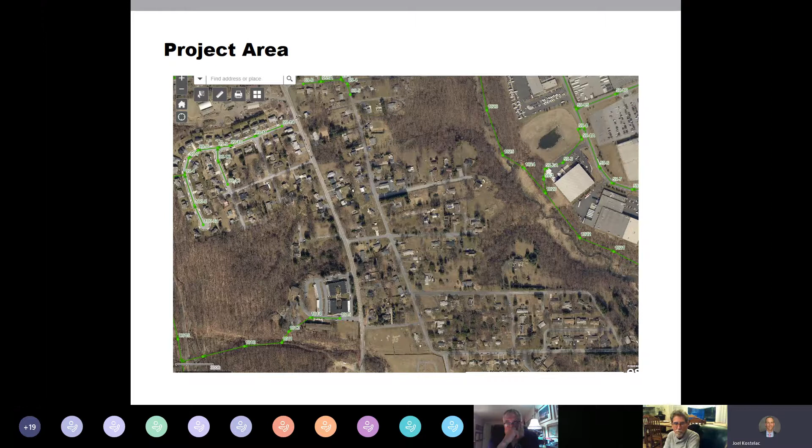So the project area encompasses the final portion of the township that has any density associated with it that is not served by sanitary sewer. It includes areas both east and west of Progress Avenue, from about Park and Wilhelm south to the cemetery, essentially where the borough or township line is, covering that whole area. This picks up some properties on the west of Progress Avenue that were not served when the northern portion of that development was constructed, and then areas associated with Wilhelm, Beaucrest, and Beaufort on the east side of Progress Avenue.

Some of you know this, but the reason this project is being required has to do with something called an Act 537 Sewage Facilities Plan, which was completed by the township and approved by DEP in 2013. This regulatory act requires municipalities to do comprehensive planning of their wastewater facilities on a regular occurrence. As part of that, some of you have been in the neighborhood for quite some time - there was water sampling and general survey work accomplished by both us on behalf of the authority and the township's engineer at the time. Through that analysis, the DEP is requiring the township complete this project, and the township, through the authority, is ultimately the vehicle for implementation.

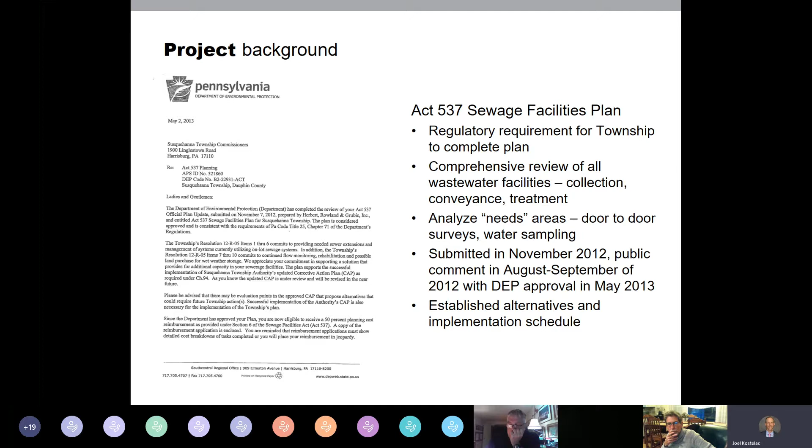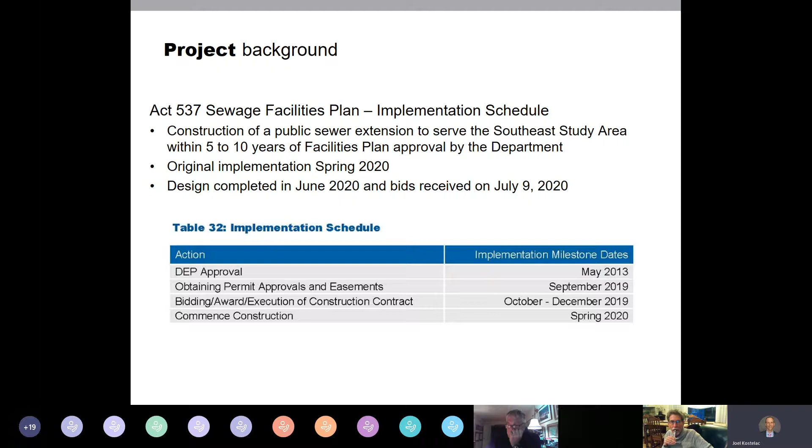The original schedule called for implementation of the contract commencing construction in spring of 2020. Obviously, due to a lot of other circumstances, that's delayed a little bit. We did complete the design in June and put the project out for competitive bids, as required by the public bidding law, and received those bids on July 9th. Since then, we've been working with the contractor to get into a position where the authority was ready to award the contract and proceed with construction.

Just some facts about the project - it is not an insignificant project whatsoever. It is quite extensive and expensive. We have about 17,000 lineal feet of gravity sewer mains and laterals. That's the piping in the street as well as the lateral piping that goes to your property line.

We have 92 manholes, 2 grinder pump stations, and associated with those grinder pump stations, about 600 feet of small diameter force main, 1.5 and 2-inch force main. And then, of course, with all of that comes putting your neighborhood back together - streets, yards, right-of-ways, stream crossings, etc.

As many of you probably know, the existing sanitary sewer facilities are on the other side of the creek, east of the creek on the east side of Progress Avenue, and then on the west side of Progress Avenue, there in Park Road, which was previously constructed by McNaughton. So many of you will flow to one of 4 connections across the creek, and others will go north towards Park.

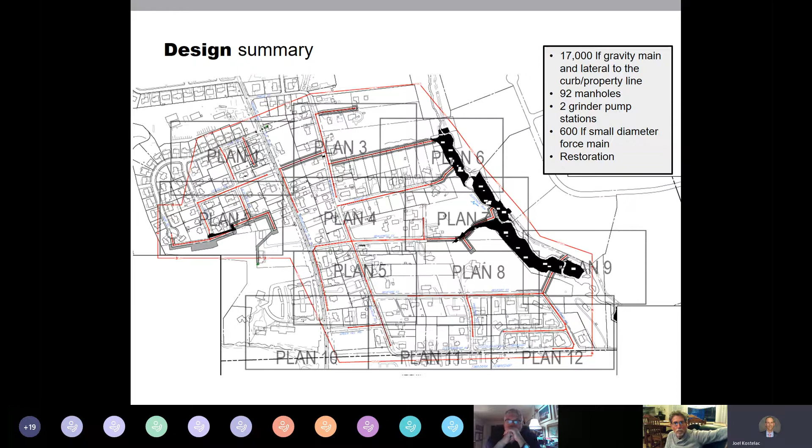So ultimately, those 4 tie-ins on the other side of the creek are sort of the critical pieces, obviously, to be able to make connection to the existing facilities. So that's a bit of background. Again, I think many people maybe already know that.

There is a connection fee due to the authority - that's also referred to as the tapping fee. It was established well over a year ago at this point at $3,000. Although that is a lot of money, there's no question, it is significantly less than what the authority had the capability to charge.

As you'll see on a slide later, this is not intended to be a revenue source for the authority. Much of the cost of the project is being taken on by the authority and its base of customers. This tapping fee of $3,000 was established essentially based on a sort of an average or common fee amongst the rest of the township. There are other extension areas that are actually significantly more than this. In this case, the authority chose to keep it at what they felt was a reasonable and competitive fee.

You will also be responsible for the installation of your building sewer, which is the pipe. We'll have some graphics showing about the curb line, so where you would connect to the authority's contractor's piping, about your curb line - I recognize there's not curbs, but curb line - property line to your home. Of course, many of you have septic tanks, so that piping will either go through your septic tank or bypass your septic tank at some point.

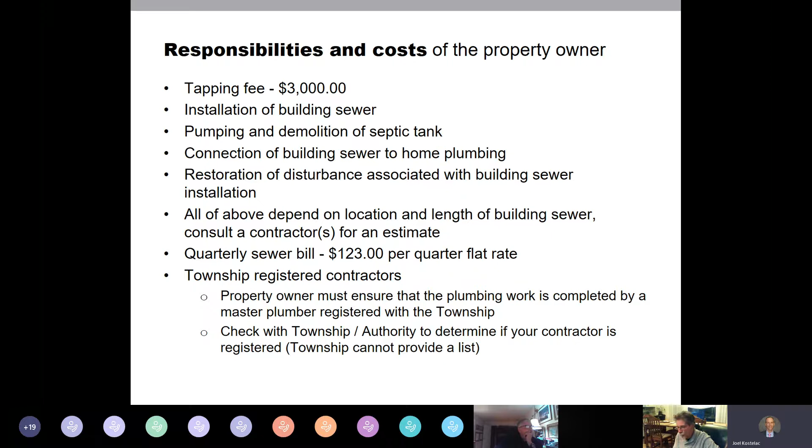A lot of questions also about contractors or plumbers. Ultimately, the township policy is you must have a master plumber registered with the township. They don't have a list, or they won't give out a list, because as a public entity we don't want to give the appearance of favoritism amongst a certain group of contractors or plumbers. But if you have a plumber or two or three in mind that you're planning to bring to your home for an estimate, you can always call the township and ask if they're on the list, and they'll let you know. If you have a contractor that's not on the list and would like to get on it, they can also contact the township and work through that process to the extent possible.

With regard to financing, we shared this last time as well. There's a couple opportunities through PENNVEST, the PENNVEST Homeowner Septic Program, that allows you to borrow at reasonably low interest rates. That information is in the slides, and you could contact them directly. These days, I'm not certain these rates are any better than a rate you might get from your local bank, but certainly perhaps worth looking into.

With regard to other grants and loans on the authority's behalf, the authority did receive some funding from the gaming grant program. We also applied for a grant through the Department of Community and Economic Development, an H2O PA grant for sewer projects like this. Sadly, there was $500 million worth of requests and $24 million worth of award, and Susquehanna Township Authority was unsuccessful, as were many other communities in central Pennsylvania.

So again, this is primarily being financed 90% plus by funds that the authority has borrowed.

In the good old days, when we had projects like this, we would stand in the room, and as you left, we would hand you a stake or a flag. Obviously we cannot do that now, so we'll do this a little more personally, probably street by street, as we go with the contractor and locate those laterals. The contractor won't install the service lateral until we've connected with the homeowner to confirm that location. I think it probably will work out better this way—a lot of times the stakes get lost, or run over by a lawnmower, or hit by the snowplow, and ultimately have to be put back anyway.

So in this case, the contractor and their crews, as well as the authority staff and our staff, will make sure that as we go down the street, we locate those laterals with the homeowner in mind. We'll find ways to get a hold of you, recognizing that people work and might keep odd hours, but we will find ways to make sure you're clear on where your lateral is and is not going to be.

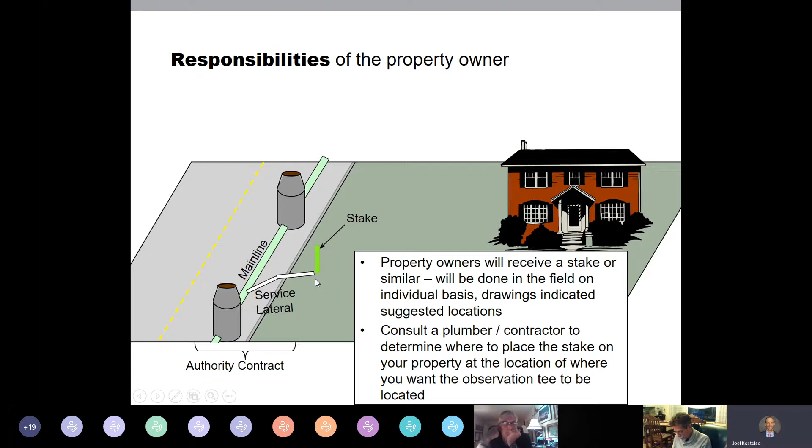Ultimately, this lateral will be constructed, and an observation tee will be put in about that location of the stake, near the property line, and then it'll be your responsibility from there to connect to that tee. Now, the timing of that is—ultimately you'll receive a connection notification from the authority saying the sewer system is now live. You have 60 days to connect.

That said, they may be working in Euclid in 2 weeks. It won't be 60 days from then that those of you who live on Euclid will need to connect. As I mentioned earlier, there are several tie-in locations on the other side of the creek that

the contractor will not get to until next year. And ultimately, as you know, the old adage is it flows downhill. So if you're at the top and the bottom isn't connected yet, obviously you're not going to be able to tie your building sewer in. So there will be a bit of fluidity to all this.

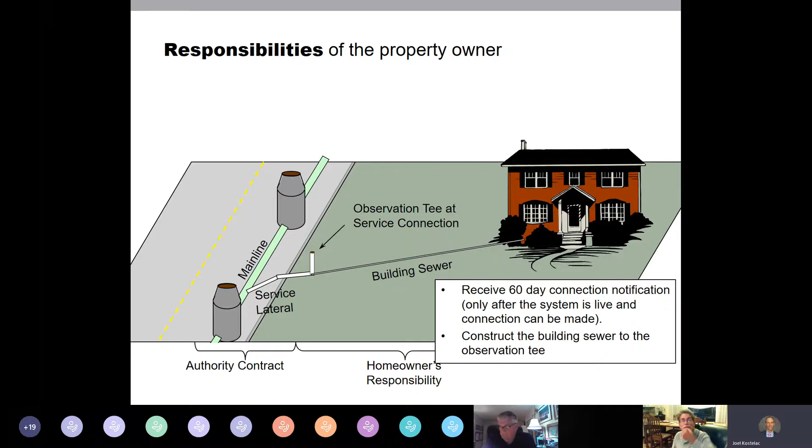As the contractor completes work in specific areas and can make those parts of the system live, once those things have been tested and are able to be live, then those connection notices would go out. The point I'm trying to make is you're not going to receive a connection notice with a 60-day clock prior to you actually physically being able to connect to the sewer system. And then at that point, you'd have those 60 days to connect.

Just some photos. This is what an observation tee looks like, as many of you probably know. You've seen them as you drive around the township. This clean out cap ends up on the end of them. You can see the building sewer is this 4-inch pipe, and the service lateral is the 6-inch pipe. So what this shows is the service lateral essentially tying right into the building sewer, and in the case of this photo, that was what occurred.

In some cases, depending on where your plumbing comes out and where the main line is in the street, it may not be necessary for you in your own specific circumstance to be at the same depth as the service lateral. So if you can be higher than the service lateral and it still works out with your plumbing, then you're welcome to do that. What we'll end up doing is having this come up at a bit of an angle.

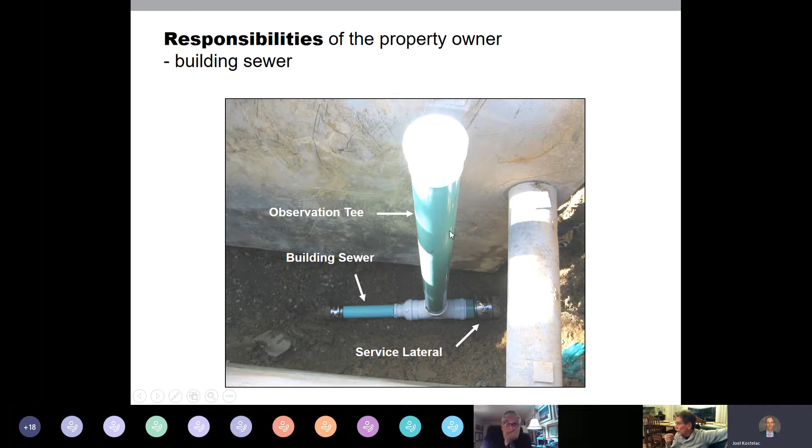What that ends up doing is saving the homeowner some costs, because in addition to length, a big part of the cost of the installation of the building sewer is the depth as well. So that's something as we get into the project, we will go through with the individual homeowners as we and the contractor go by.

So what can you expect? It is an unpleasant experience. I can tell you that from firsthand knowledge. There's very large equipment that's going to be on your street at any given time. There's going to be some noise. I recognize that

a lot of us are still working from home, or working from home more perhaps than we were, or your kids are at home trying to do school certain days. So there's going to be some discomfort associated with that.

You've already probably seen some of the machines come in. There's going to be some materials along the streets as they work down the streets and into the right of ways. We'll have roads not so much temporarily closed, but might be one way or one lane at a time kind of thing, or some temporary paving situations as they clean up at the end of the week

before a better temporary pave job can be done. So there's gonna be times where you're probably gonna be unhappy with what's happening. I will say that the direct discomfort in front of your home will be short. We're going to be in this neighborhood and area for quite some time, but we'll try to get past folks' house and off your street as soon as possible,

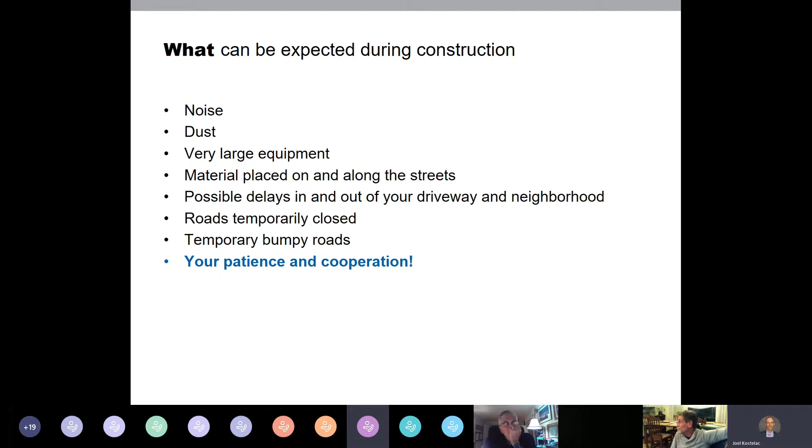and move to the next street or move down in the right of way. Once the contractor is down in the right of ways, aside from traffic going down into the right of ways, and the noise that you might hear from that, largely they'll be at least out of sight for the most part, unless you of course are right at the edge of those right of ways.

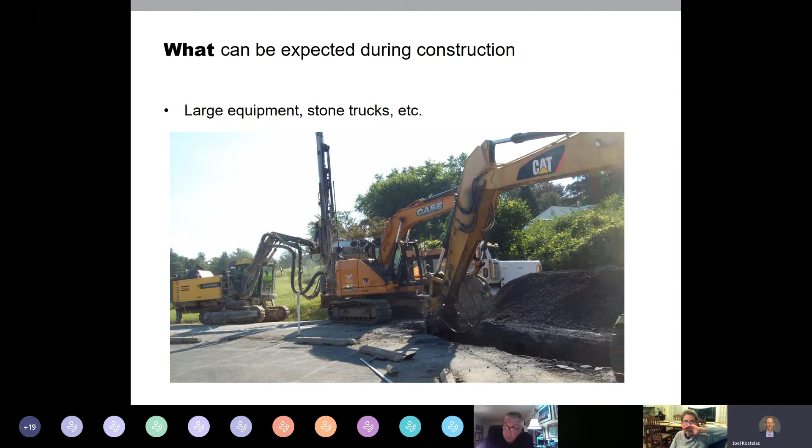Again, here's some photos. Large equipment, stone deliveries, whatnot. If you haven't seen these, as you're driving around and seeing projects going on in other areas, these are fairly narrow cuts in some cases. There are some places on this project where we have very, very deep excavations, upward close to 20 feet. In those cases, you'll have not just one trench box, but two trench boxes stacked on top of one another to make those excavations safe for the workers.

And then, again, like you see here, we try to keep the main lines to one side of the street or the other to allow for continued traffic to pass over the rest of the roadway. I recognize that the roads in this area aren't the widest. So you're going to have access. The contractor's going to have to make it safe for you to access, especially obviously if you have to cross those trenches and things.

For instance, in this picture, this person's driveway was essentially cut off for that period of time, and perhaps that's a good time to answer that common question: am I going to be able to get in and out of my house? In this picture, what likely happened, and what will happen on this project, is the contractor's crew and/or our staff and/or the authority staff will knock on your door, perhaps that morning, or the day before, and say, hey, we're going to be working in front of your driveway tomorrow. Would you like to move your vehicle so you can get in and out, just up the street a little bit?

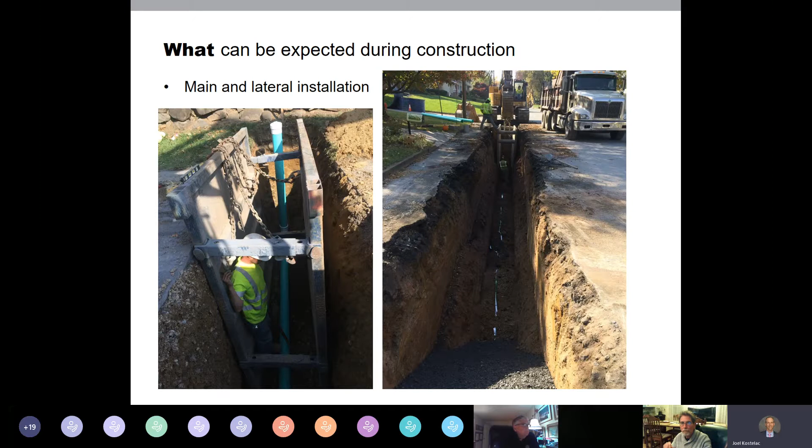Again, manhole installation requires a bit bigger of an excavation to install, and then there'll be some temporary paving. One of the things the contractor is doing is starting in the roadways rather than down in the creek, so that we can get temporary hot asphalt as long as possible here before the end of the paving season, so to speak, so that we can have a little better temporary pave job before the end of the paving season.

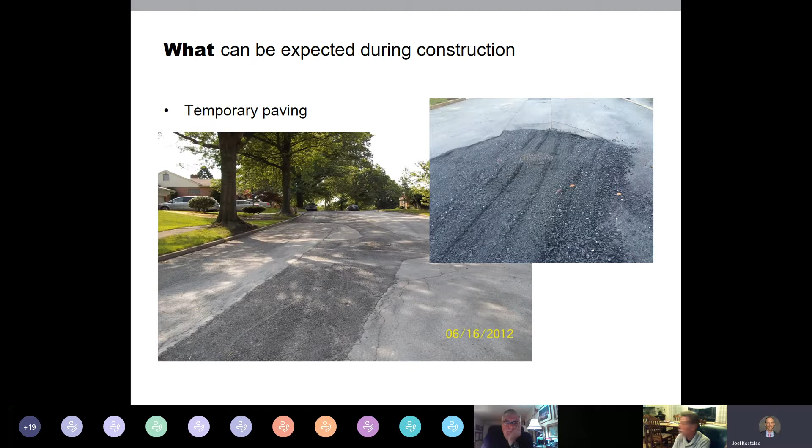Ultimately, the street will be overlaid. You won't have trench paving. It'll be edge to edge, or curb to curb, so to speak. But that likely won't occur until next spring at the earliest, when the paving plants reopen. And there's two reasons for that. One, we're running short on time, but two, more importantly, we would likely let this sit anyway, because we like to give the trench an opportunity to settle a little bit over the course of the winter, and then come back and pave and get everything up to grade again, and hopefully reduce the chance of settlement in that trench in the future.

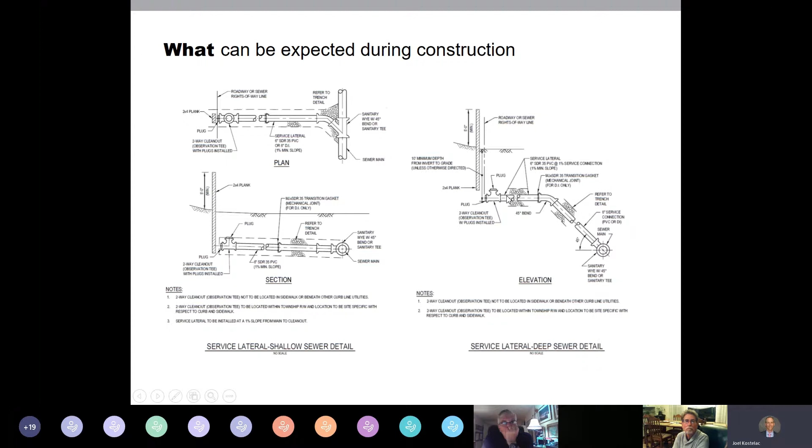What does your lateral look like? Again, you saw some photos of it. It's simple 6-inch SDR 35 piping to the right of way, and then from the right of way you have that clean out and 4-inch SDR 35 piping back to the house. Again, your contractor or any plumber registered in the township is aware of the requirements of the authority in that regard, as said earlier.

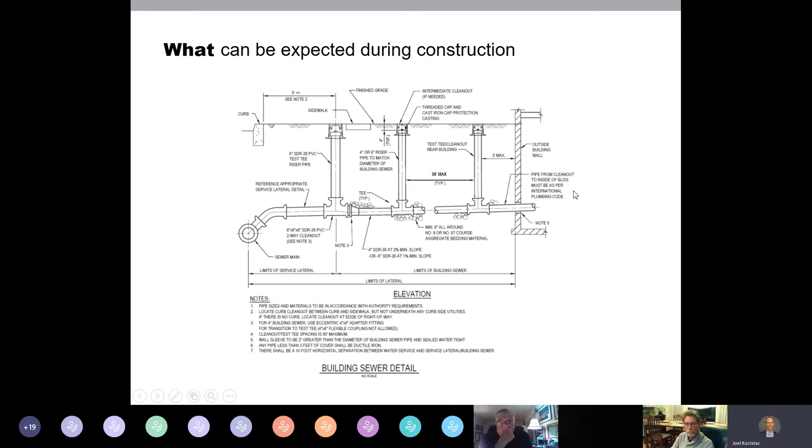So that's some of the project details. This is a bit of a summary on the costs, in case you were wondering. We did receive 7 bids in July. Those bids ranged, for the entire project, from about 3.6 million to 5.7 million. That 5.7 million was a bit of an outlier; they mainly landed from the low bid of approximately 3.6 to about 4.5 million. R-III Construction Inc. was the low bidder and was awarded the contract just at the September Authority board meeting.

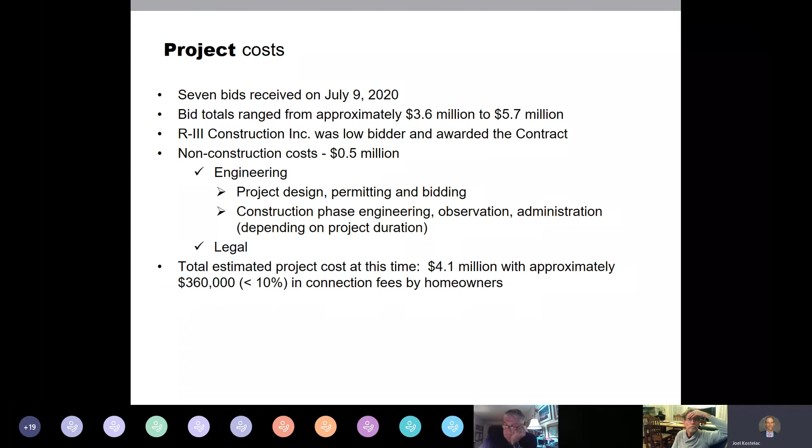There's about $500,000 in costs associated with engineering, permitting, bidding, and legal fees. That gives us a total project cost of about $4.1 million. If you do the math, there's about 120 homes in the project area at $3,000 each. That's $360,000, or less than 10% of the project costs, with over 90% of the project costs being absorbed by the authority.

So what happens next? The contractor is going to continue to mobilize. They have some more pre-construction coordination to do, particularly with regulatory agencies like the DEP and the Dauphin County Conservation District. That happens in the coming week, and then past that, they will commence construction. What we're being told at the moment is they're going to start on Euclid and Wilhelm, working in those paved areas, then staying on the east side of Progress Avenue, working on Beaufort and Beaucrest as well, and then transition from there, which will take the better part of the rest of the year, if not longer.

Transition from there down into the right-of-way areas that go down to the creek. One reason the contractor and we like to do that work in winter, particularly January and February, is when the ground is frozen harder, it makes for less of a messy construction situation. If you've been down there, it's pretty wet, and there are wetland crossings that need to be done. We need to cross the creek, and we like to do that in a way that doesn't create as much disturbance as possible, so doing it in the dead of winter sometimes helps.

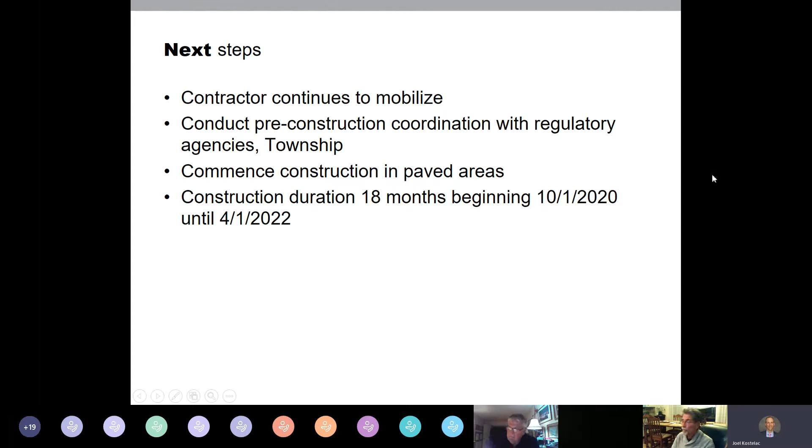So that is the end of the presentation.

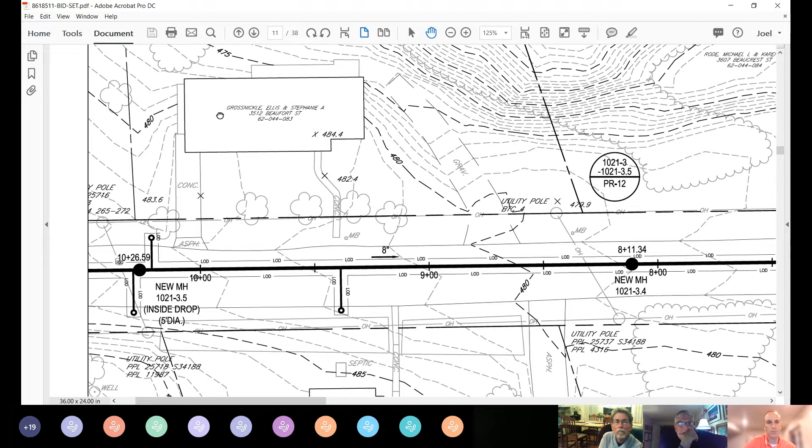So ultimately we'll come knock on your door and ask you. I can see there's a tree here, but I suspect your plumbing probably comes out back here somewhere, so this side is probably the best and only place to put it. But certainly if you want to run it the other way, you can, it's just the longer you go, the more it's going to cost.

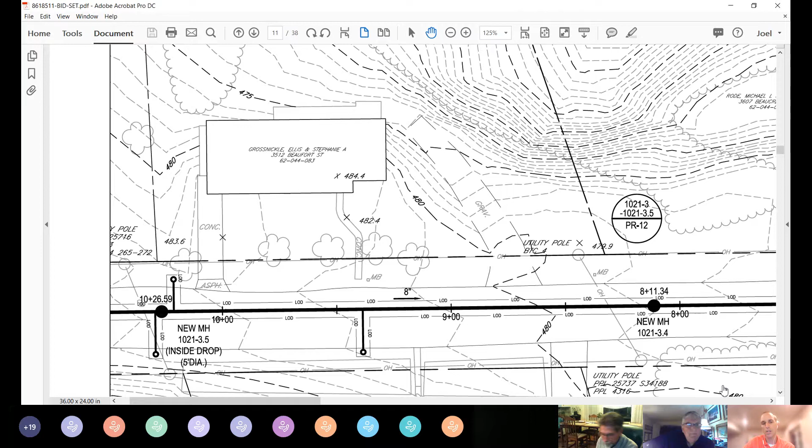Is there a restriction on how close the line can be to the building? No. Some of it has to do with depth though. If your plumbing is very deep, or below your slab, your contractor may not want to undermine your foundation, so they might want to come off the side. The real restriction is they need to get a machine in there to dig, with a track maybe 3 feet wide, and they're not going to want to sit right on top of your house. So it'll probably end up being 5 or 6 feet from the house anyway.